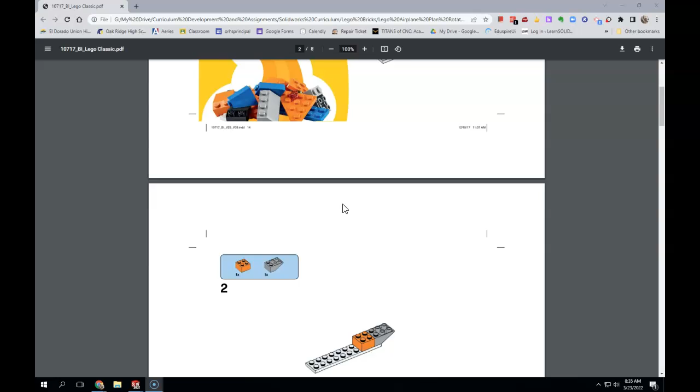This video is going to show how to finally assemble together individual Lego components into the airplane. Ultimately you're going to end up with something that looks like that, from all the individual components that you've already modeled.

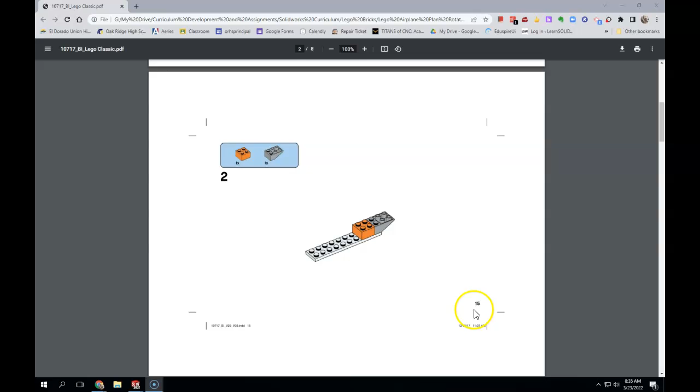What you're going to want to do, we're going to work on page 15 to start in this video. You're going to want to open SolidWorks and preemptively open the 2x10 part, the 2x2 triple part, which is this other one right here, and the inverted wedge.

Now I've already opened them in my SolidWorks. I've got them open here. How you would do this is go File and Open. You would need to find your folder where you had saved your Lego parts. So that's an important last step.

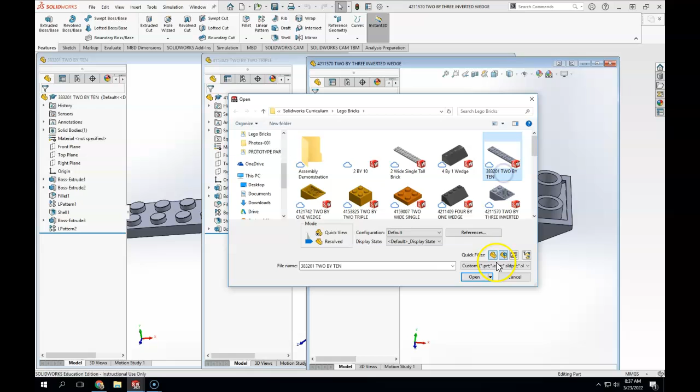Now I've got it shown as large icons right now, which makes it easier to pick the parts out. In File Explorer you're likely just going to be showing a list that doesn't graphically show here. But if you come to this selector, change your view, and come to large icons, that actually shows each of these components in the folder, which will make it easier if you didn't use good file naming convention to show you which parts. You're going to need to open these parts. You could highlight one of them, 2x10 here, and click open, but I've already got that open.

Okay, now that you've got these 3 files open that you're going to need for page 15, I'm going to go File and New. And what we're going to be making now is an assembly.

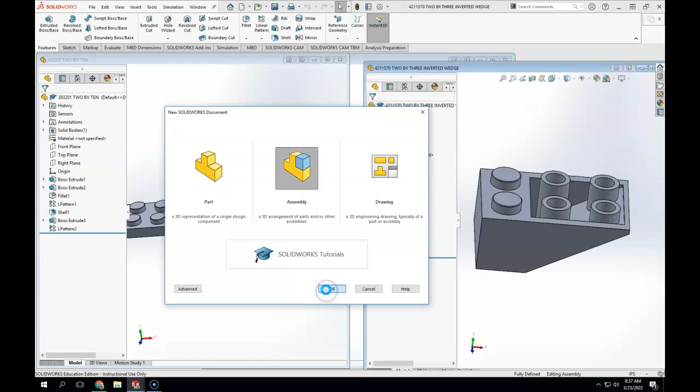The very first step that I recommend you do once opening a new assembly is going to be to go File, Save. After doing this, as soon as we do this next step, you're going to want to save your work. You can see that to begin the assembly, we have got already these 3 items open.

What you're going to want to start off with is the 2x10. Notice how I'm clicking on this and dragging it into the modeling environment, which is now going to be as if you had the piece of Lego in front of you and setting it on the table. When I click right now, that was a left mouse button click. It has now placed that Lego piece inside of the modeling environment.

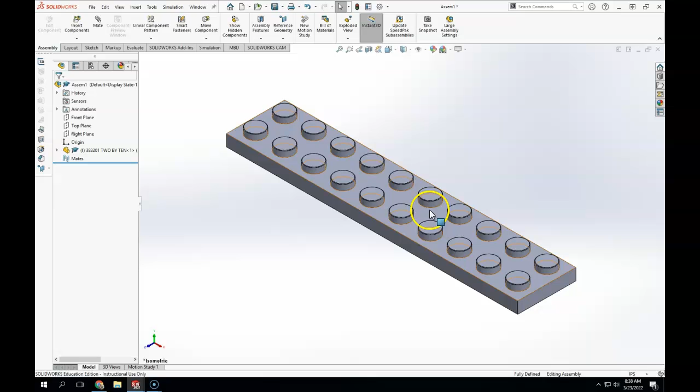Now, if I do a Control 7 to go to isometric view, this Lego is kind of showing this direction, but we're going to want to make it look, for the ease of assembly here, notice that it's kind of opposite how I really want it to be based off of the instructions here. The way that I'm going to do this is we've dropped this in and you can see the letter F in front of the part in the feature manager tree.

I'm going to right click on that and make this element or this part float in the modeling environment. This is going to enable it now. You can see that goes to a negative sign. Previously it couldn't move around, it just kind of was dropped in space. But now I'm actually able to click and drag and move this around.

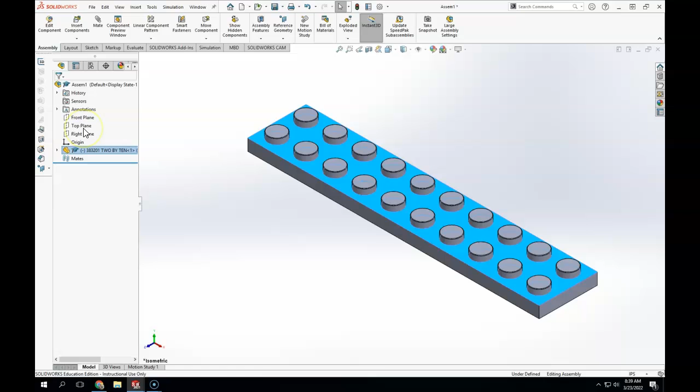Now you could see the planes as reference later, but what we're going to do here is a mate, to actually orient these parts in space. Front plane is right here. What I'm going to be doing is mating the front plane to this small front face of the part. And we're going to see what happens.

So I'm going to click on this thing that says mate, the paper clip. This is what's going to actually allow things to get assembled together in space. Now notice I had the front plane was previously selected. So front plane right now is in mate selections here.

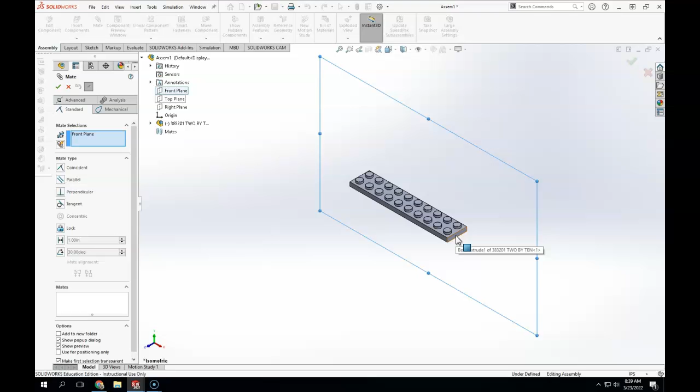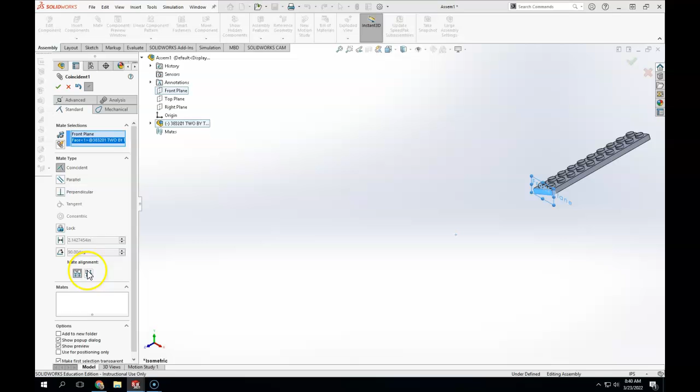I'm going to come in and carefully select this leading face of the part. And when I do that, it kind of flipped around here. That is what's called a coincident mate, meaning that those are going to be touching each other. I'm actually going to want these anti-aligned. That's kind of close, but what I want then is anti-alignment. And if I press the letter F on the keyboard to fit,

notice that the part is kind of at a weird angle right now, but we're going to fix that in a moment by mating. So once I did that, I like that mate. I'm going to click that. Now I'm still in mate mode because I have keep visible pinned. If I didn't have that pinned, it might disappear, so you're going to want to click on this keep visible icon to keep doing more mates.

Now I'm going to do another coincident mate, and I'm going to use the top plane. I'm going to select the top plane in this pull down. If you're not seeing it, there's the pull down menu right there. I want to mate the top plane. I'm going to use the orbit feature. I'm holding down my center mouse button and orbiting around.

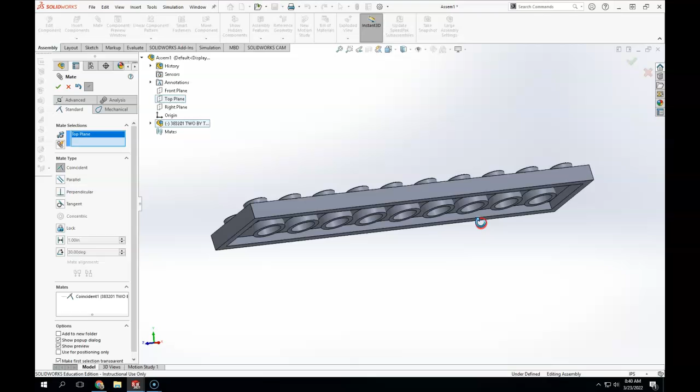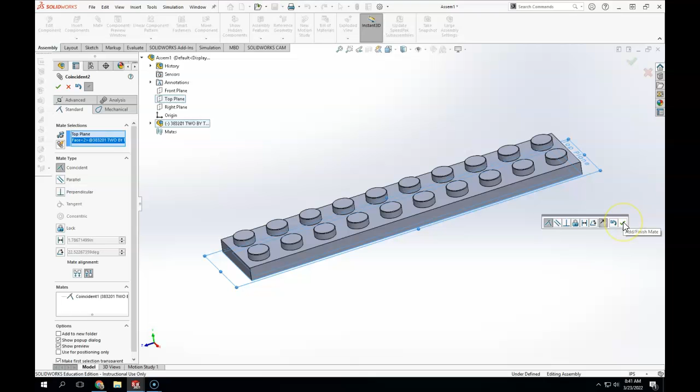There are several surfaces you could select to do this, but I'm going to select the bottommost face of the part, coming all the way around. When I do that, it's out of view right here. I just pressed the letter F to make it visible. Notice that the top plane and the bottom face of that part are now coincident, touching each other perfectly. I'm going to hit the green check mark either here or right here to finish the mate.

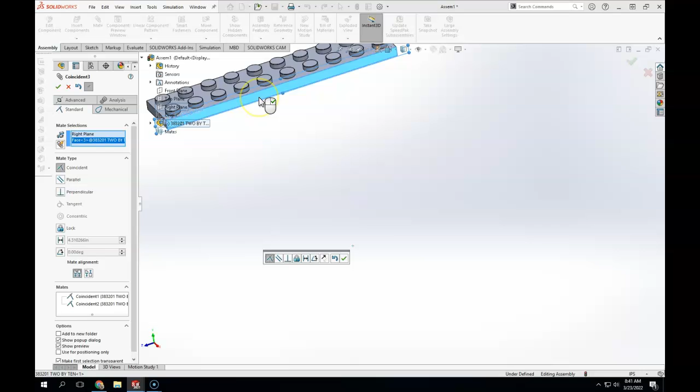Now I've got one more mate that I'm going to need to do, because this is still able to move side to side like that. I'm going to do a mate with the right plane. I zoom out a little bit. So the right plane's all the way back there now. Oops. Well, I'm going to do it between the right plane and this face right here. That is now mated together. If I press the letter F, we now have something that looks very similar to how this is oriented on page 15 of the instructions.

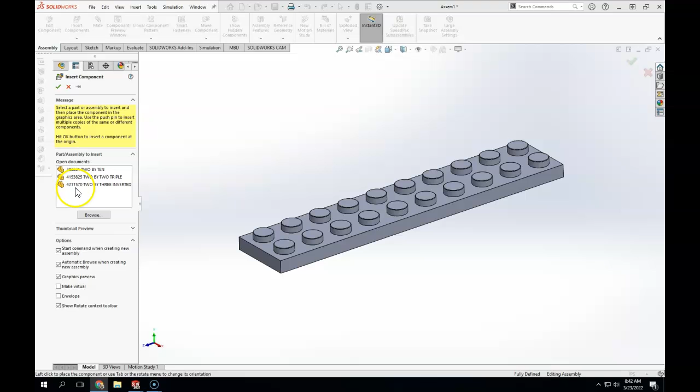Okay, so now the 2x10 is in place. Now I'm going to come and insert components. Since I already have those files open, I'm going to come to the 2x3 inverted wedge, which is the part I'm going to be putting into the assembly. So this is where your naming convention would have been important. So I click on that once, and I'm going to drop it somewhere in this view. There.

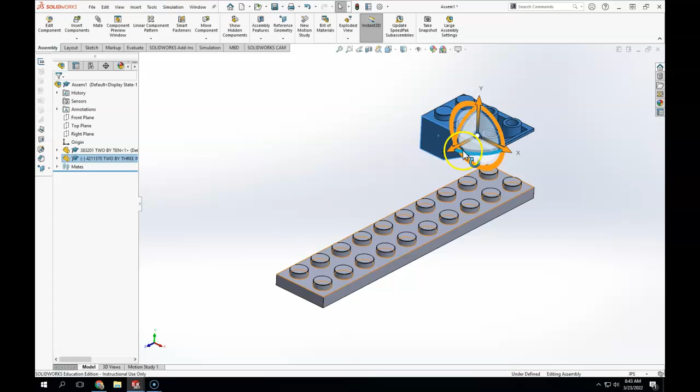Okay. Now, if I orbit around, this part is out in space and can be clicked and dragged and moved around with my left mouse button. But I want to show you how to get it into a better position that's going to make a little more sense. If I right mouse button click on the part and come down to move with triad, it's going to give me this icon that I can click and drag. What I recommend is you see this rotator here. I'm going to just click and drag on that to get this a little closer to the alignment I actually want.

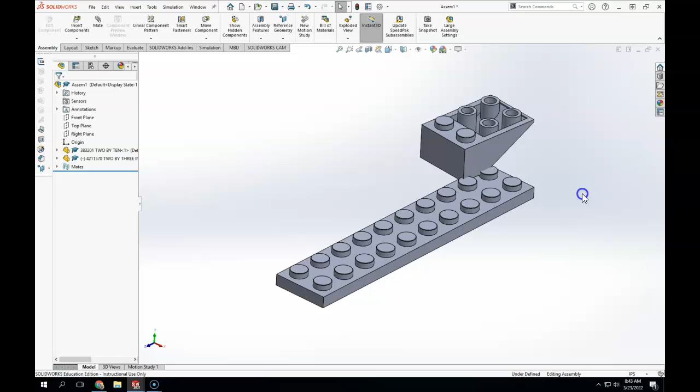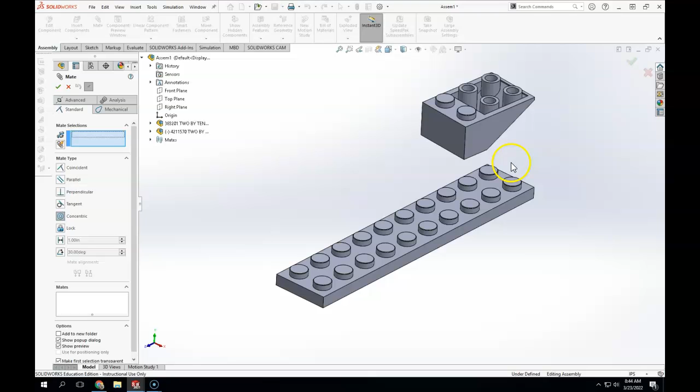Now, to get these parts mated together, I'm clicking and moving this upwards. This is a left mouse button click and drag that's going to allow us to move. We're going to use, under mates, what's called a concentric mate. What I recommend as easiest right now is using a concentric mate for that circular surface right there on the inverted wedge to this similar boss. I'm going to make those concentric to each other.

And what's going to happen is that they pull together. It means they're kind of like bullseyes relative to each other, that they're over the top. When I do that, this part now is free to move around.

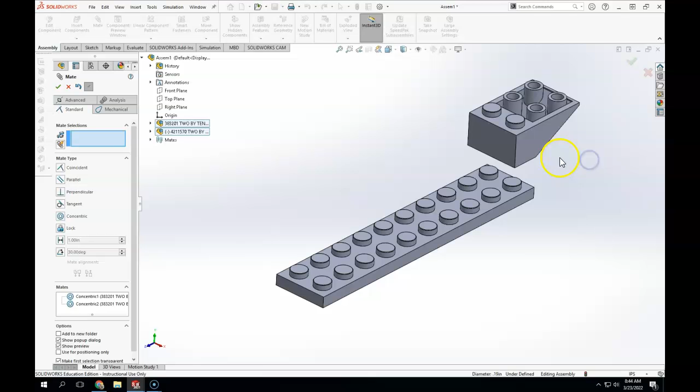Now, if you've modeled your parts correctly, the second mate that we're going to do is another concentric mate between that and that. And these parts are now nicely aligned this way, top down. Now you would have had to have modeled your parts correctly for this to work.

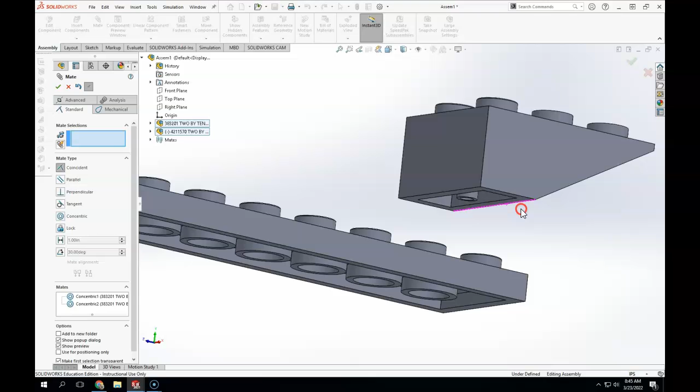And then what I'm going to do, to finish off and make these fully come together correctly, there's going to be a third mate that we're going to use. It's going to be one more coincident mate. Preemptively select coincident, and it's going to be orbiting around to look at the bottom of that face and the top face of the 2x10 right there. And that mates together and drops that part to be in the correct position for the assembly.

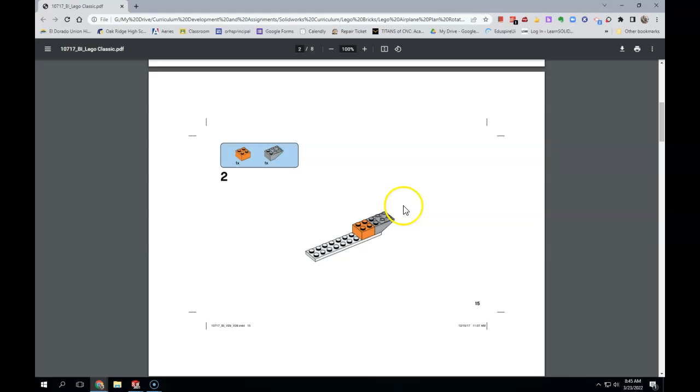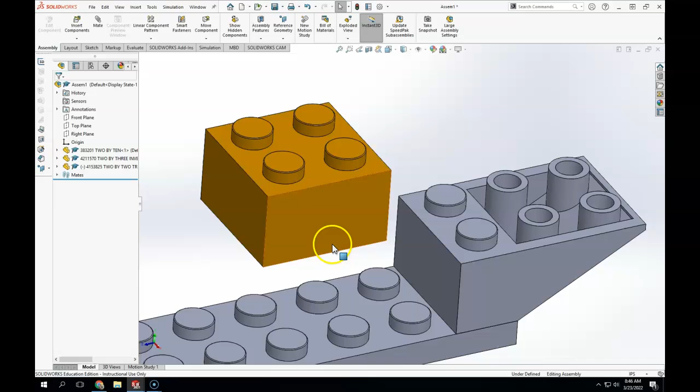Now, once this is done, I'm going to get out of mate mode by closing that out. I'm going to come to Insert Components, and I'm going to insert the 2x2 triple part. So I left mouse button click to highlight it in the Open Documents. I bring it into the model environment. I click one more time with the left mouse button, and that's as if I've dropped the part right onto the table in front of me.

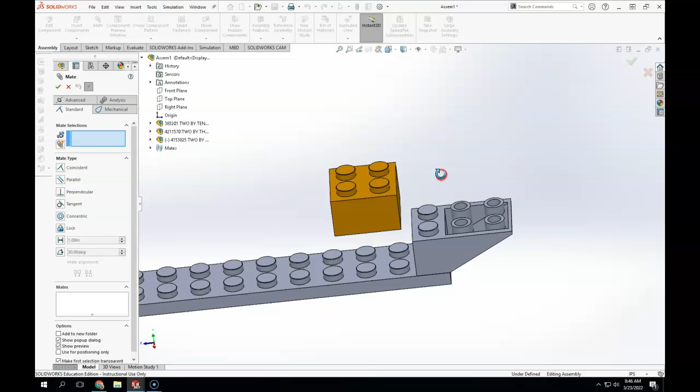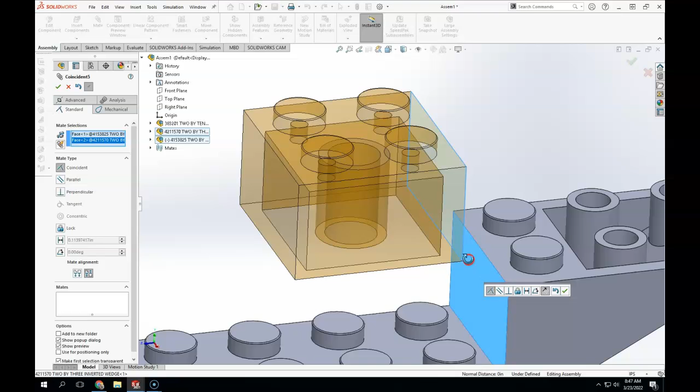And we're going to try doing a different method of mates for this one. We're going to come to mates. And what we're going to do is use 3 different coincident mates to make this part come in. We're going to use a coincident mate. We're going to use this back face of that part, coincident to this face of the wedge. And you can see how that pulled together. I like that. I'm going to hit the green check mark.

And then I'm going to select this face and this face of the 2x10. I'm going to preemptively select, force that to be a coincident. Selecting that there. Notice the part kind of went downward as well. Now when I do this, I'm going to click green check. The part's kind of hanging out inside of this face here. Notice that I can left mouse button click and drag upwards. It now can no longer rotate in any direction, but it can translate up and down.

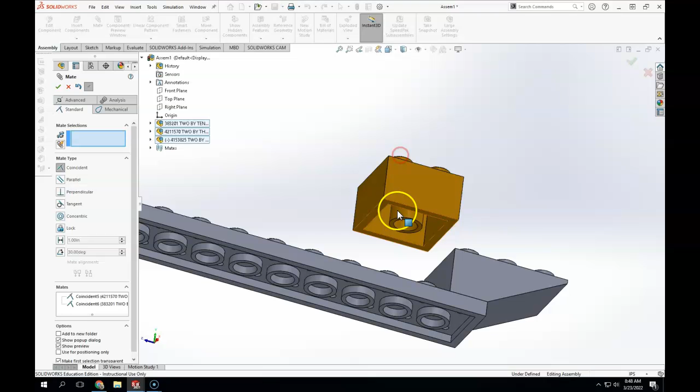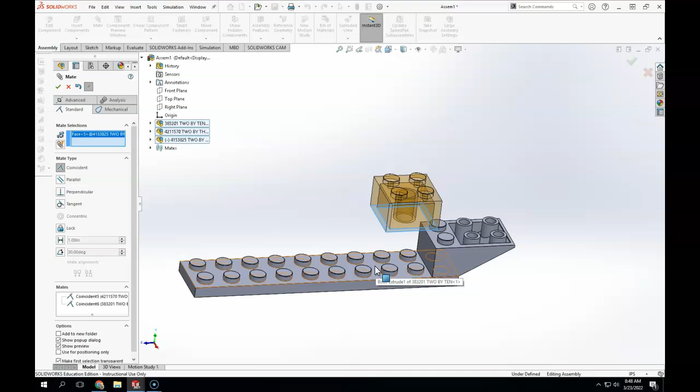And to eliminate that ability for it to translate up and down, we're going to do one more coincident mate. So the 3rd coincident mate. If I orbit around to the bottom, I'm going to zoom in. I'm going to select the bottommost face of the 2x2 triple part. I'm going to zoom out a little bit, orbit around, and I'm going to select the top face right here of the 2x10 part. When I do that, it pulls them together.

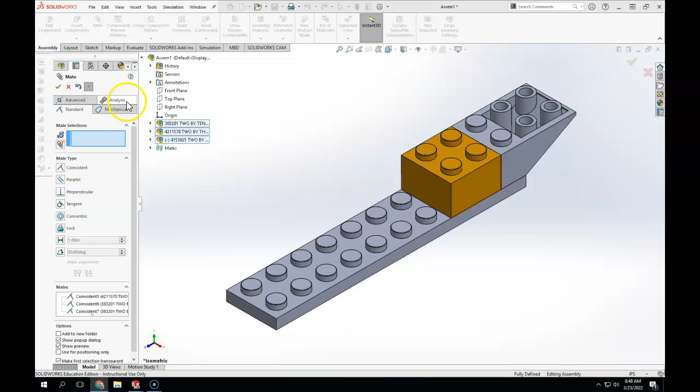And there I now have, if I do a Control and 7 on the keyboard, what looks very similar to what is represented on page 15 of the assembly notes. Now what you're going to want to do at this point, probably sooner, would be to go File, Save. Make sure that you save it to a known location.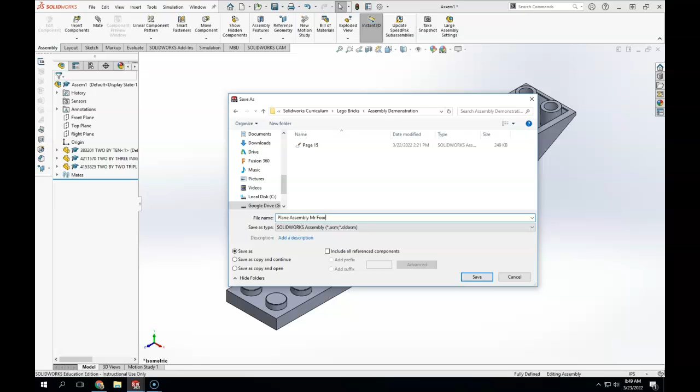So I can do plane assembly, and Mr. Foos, I recommend you do plane assembly and your name, and that's going to then save the file so that we'll be able to come back to it and continue to add parts to it. But that is how to assemble together to make it look like page 15 in the assembly.